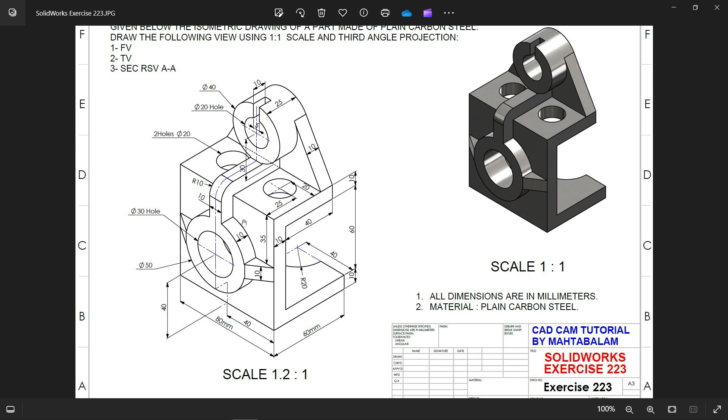We will start with this C frame. See the length 60, height you will observe 60, 10, 10, 80 millimeter, and this upper width 10, 40, 50 millimeter, and all thickness 10 millimeter, and the width of this 80 millimeter.

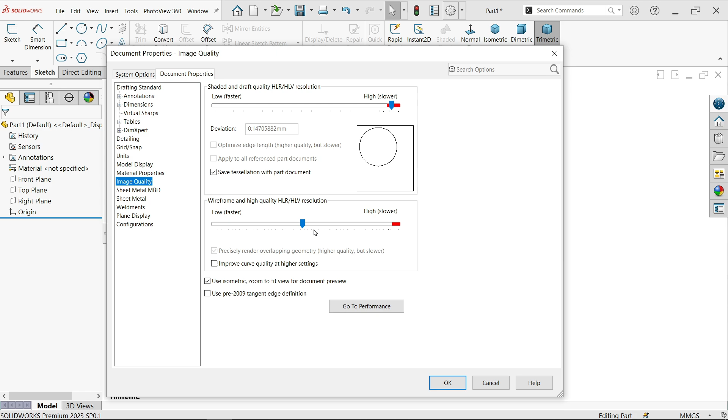So we have to first choose any plane. Let's go to option, properties. I am going to make image quality higher so that we will get a sharp edge. Unit also you can change it from here, mmgs. Now I am going to select plane, right plane, sketch.

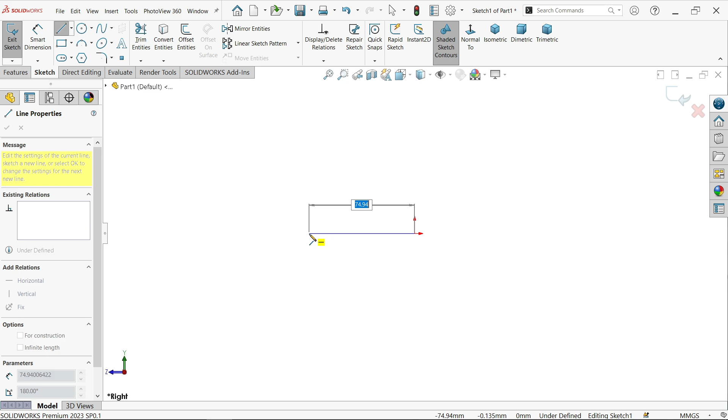Now activate line tool and start with origin. So click with left mouse and drag. Right click, choose select, and out of this line. Now activate smart dimension.

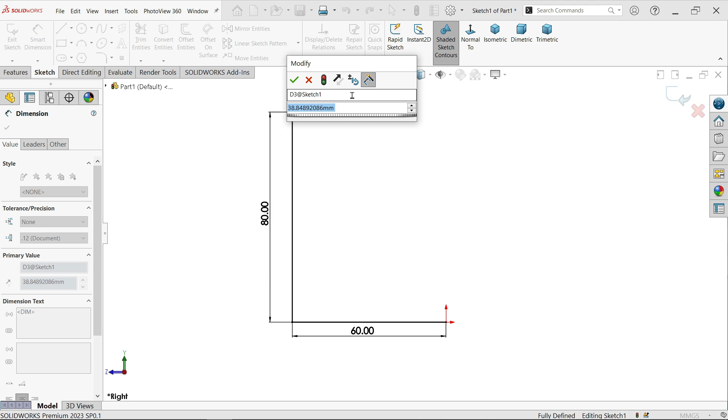Now this is going to be 60 millimeter. The height is going to be 60 plus 10 plus 10, it's 80 millimeter. And this one going to be 50 millimeter, 40 plus 10. Now simply activate extruded boss base feature.

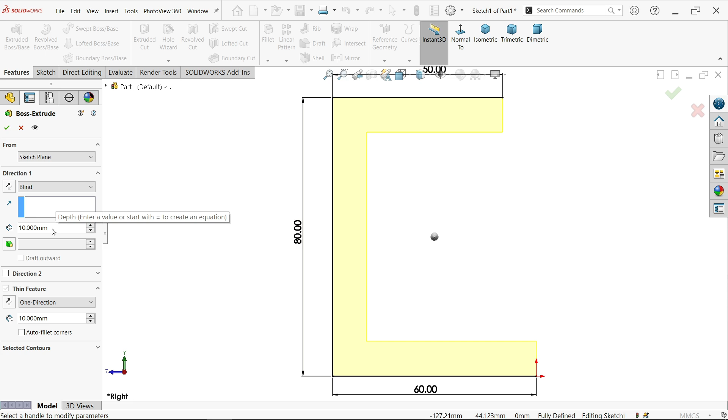Let's see normal view. Now first we have to apply direction. Start condition we will keep same, we are not going to move anywhere. In direction you have to apply the thickness or width. This is going to be 80 millimeter.

Let's see isometric view. See, but this is moving this direction. I want to move back side, so simply change direction. See, now comes down here. Thin feature activated because this is an open profile, or simply a line.

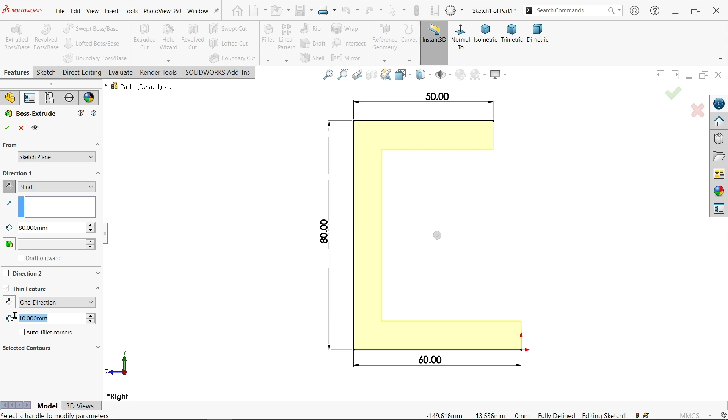Here you have to choose direction 1, direction 2, direction mid, direction 1. I want to add thickness inside, and how much? 10 millimeter. Say OK. And here look, if I select this edge, you will see at bottom right 10 millimeter length. That's it.

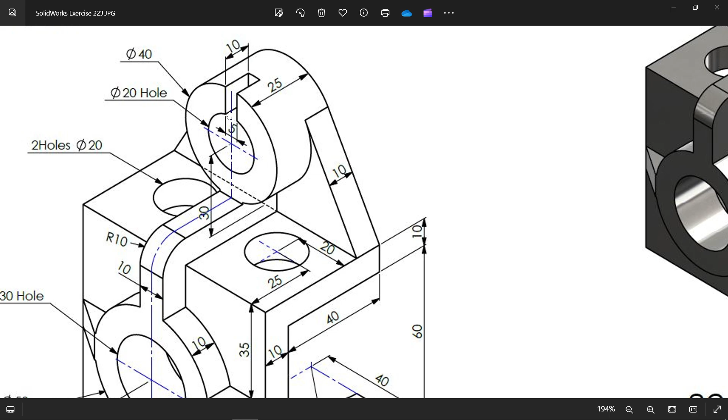Now let's add this feature. On top you will see 10 millimeter thickness, and from this line to this center 30 millimeter is the height. Now there is a circular body, this diameter 40, there is a hole 20 diameter, then there is one cutout, 10 millimeter and 5 millimeter is the width, and this width 25. So let's do this.

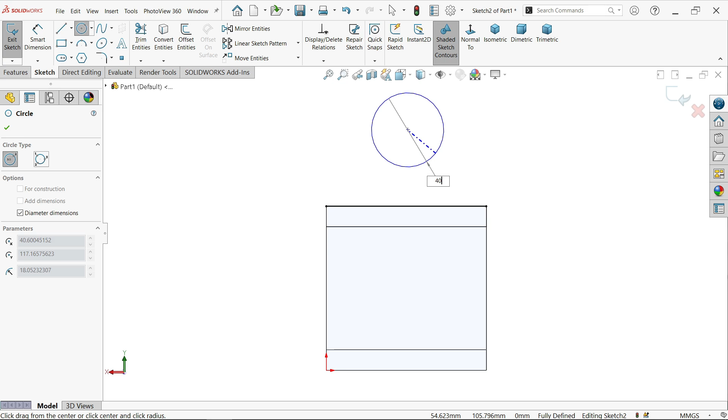I am going to select this back face, sketch. Now I am going to select this edge, convert entity. Select this edge. OK. Activate line tool. Draw somewhere 40, enter. Press escape key to exit. Now activate line tool.

Now move cursor over and you will see a tangent symbol. Look, yellow color tangent, click. Exit. Again activate line. Again I am going to activate tangent.

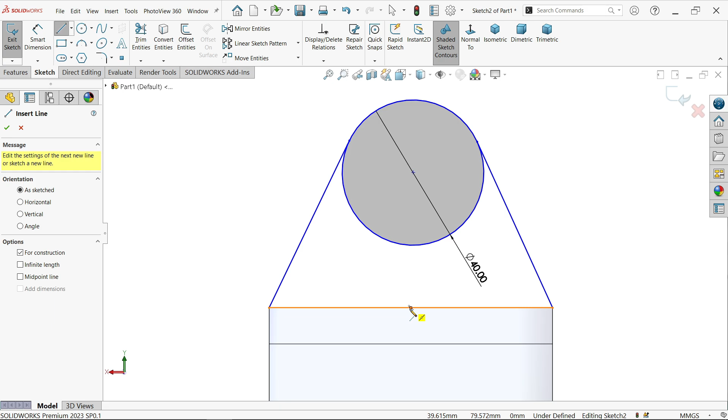Okay, let me fix this. So how you will fix? That's easy. Select this center line. Vertical. Now this is in perfect position. See, smart dimension. Now center to bottom distance 30. Look, this is fully defined sketch.

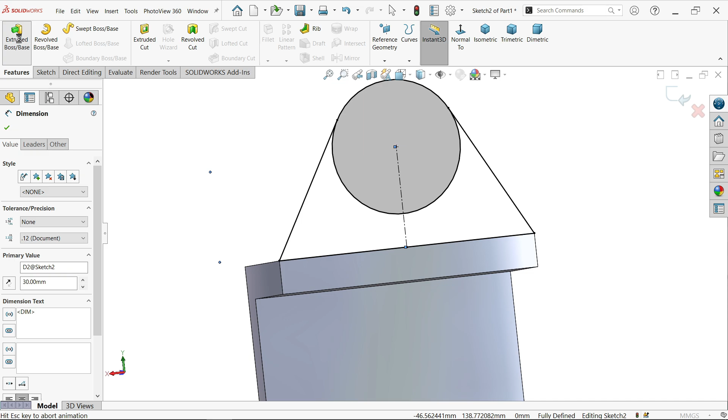Activate extruded boss base feature. And here I am going to select these two faces. Now see, in selected contour these two regions going to create, because here we have more than one closed profile. Direction blind 10 millimeter, but it moves wrong direction, so change direction, make inside, make sure it's merge.

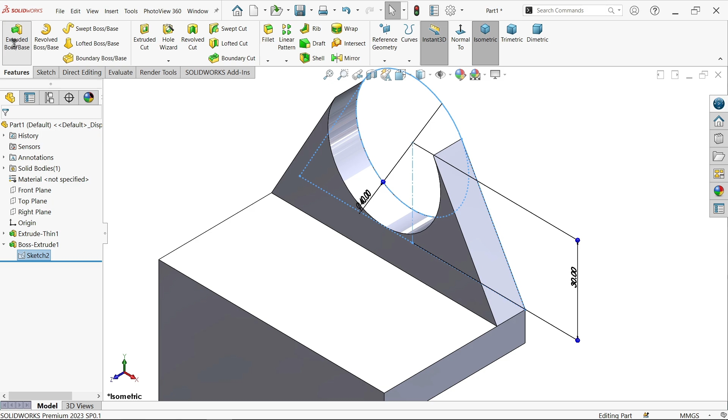Okay, look, again we have to select extruded boss base. Again in selected contour I am going to choose this one. How much? 25, but it is moving wrong side, so click this reverse.

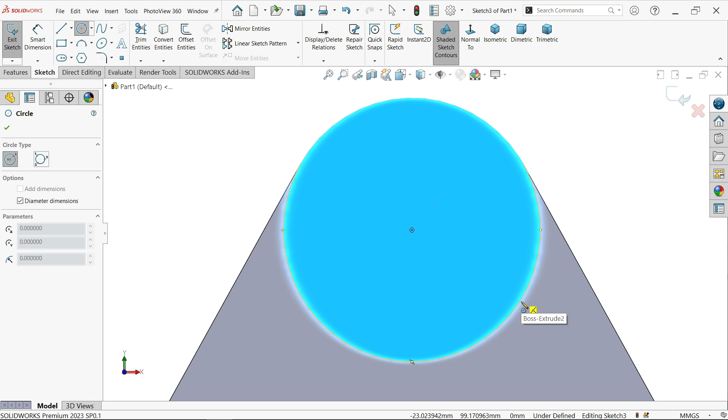Okay, look, sketch. Now here I want to create. Keep cursor and you will see center point. Now this is going to be 20. Press escape key to exit.

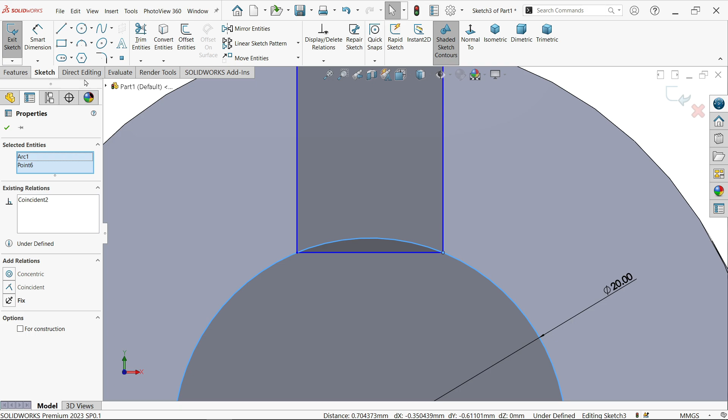Now I am going to choose here corner rectangle. Let me select this point and this one, coincide. Smart dimension, this one make 5 millimeter. Now select this one and this one, make tangent. Look, our drawing seems fully defined.

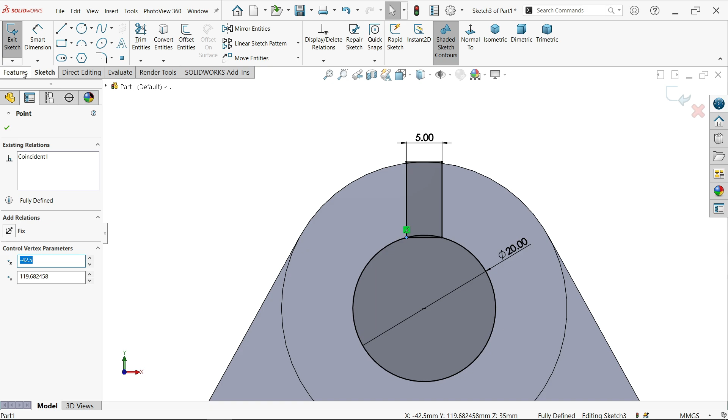This is not going to move, this is exactly at center. Now activate extruded cut feature. First I am going to select this line. If I select the line, this is going to cut a hole, and here keep end condition through all. You will see this is going to cut throughout the body.

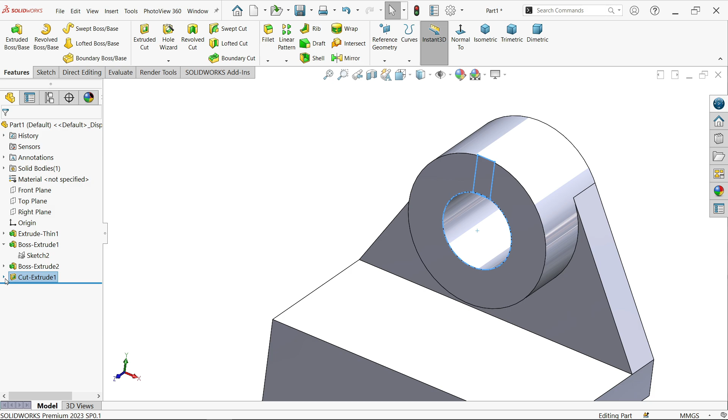Again, let's select the same sketch, extruded cut. This time I am going to select this rectangle. Look, the whole rectangle is selected, but here keep end condition blind and depth only 10 millimeter. You will see the preview here. Oh, that's it.

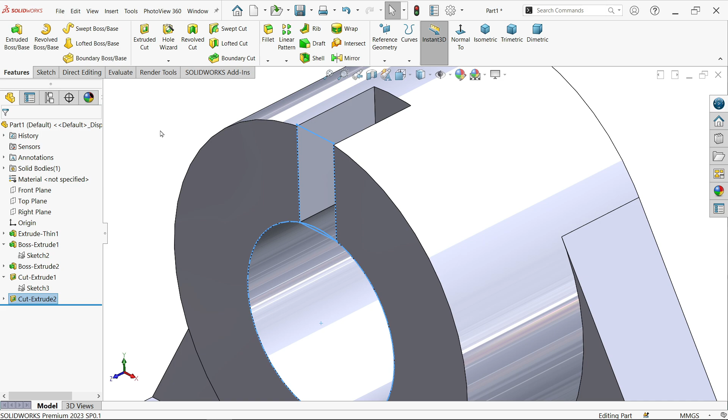Okay, now let's do one more thing. Now look at bottom back side, there is a hole cutout, R20, 40 millimeter. Then there is one circular body, you will see this one 10 millimeter depth, and this outer diameter you will see 50 millimeter, and distance 40 millimeter from this corner center distance, and distance from bottom edge 40 millimeter.

So I'm going to use hole wizard. Now here one, see legacy hole, simple hole. I'm going to choose diameter 40, radius shows 20, depth I'm not going to change here, simply choose up to next. Up to next means, okay, I'll tell you what exactly.

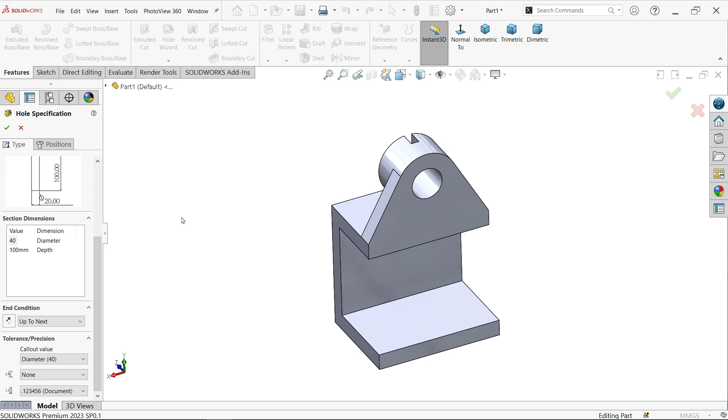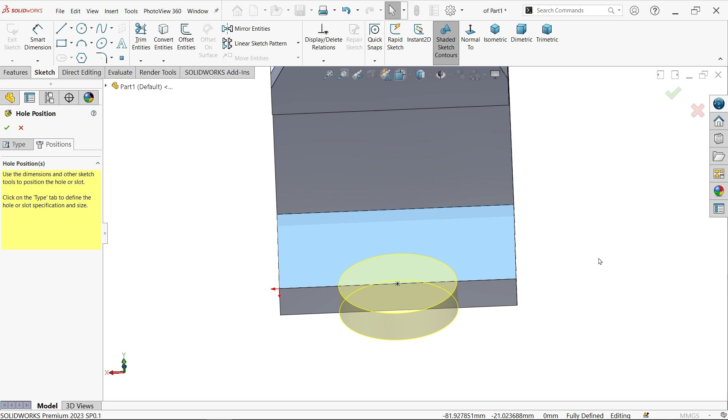Go to position, we have to select any face, so I'm going to select this face. Now look, this is activated. Now I have to place it, so I'm going to place at this center point. You will see this yellow center point is the center point of this line. So just simply press right, select. Now we selected up to next. Up to next means this is the starting face and this is the next face, so the hole is going to cut up to next face. Here we go.

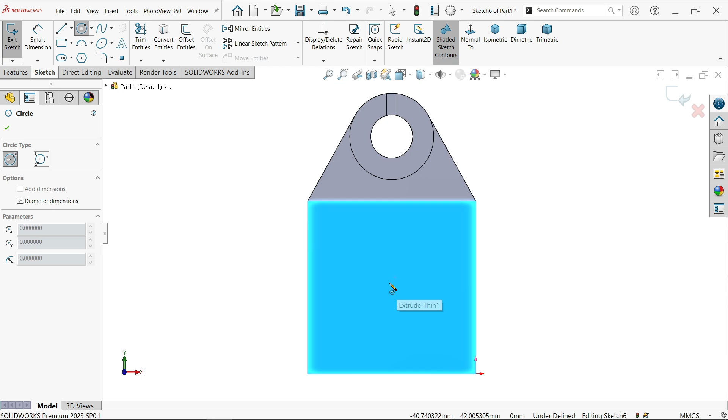Now select this face, sketch, activate circle, and here I am going to draw one circle with diameter 50, enter. Right click, select and exit.

Okay, simply extruded boss base and make depth only 10 millimeter, keep end condition blind, and direction also same.

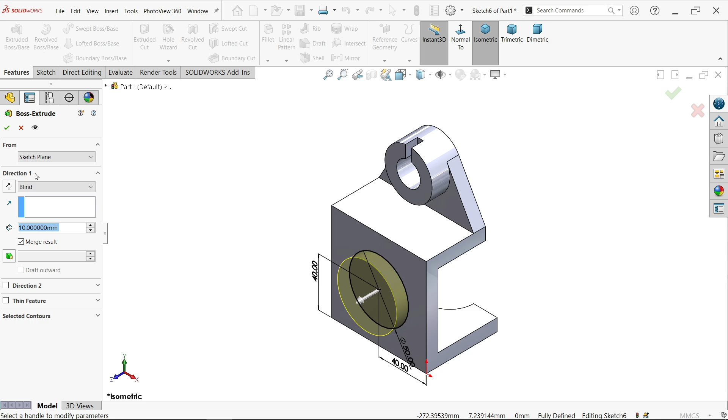Now here we have rib, see 10 millimeter, this side also same, and here also one rib, you will see clearly 10 millimeter corner radius, 10 millimeter, and this is going to fix with this. Okay, then later there is a hole, 30 diameter.

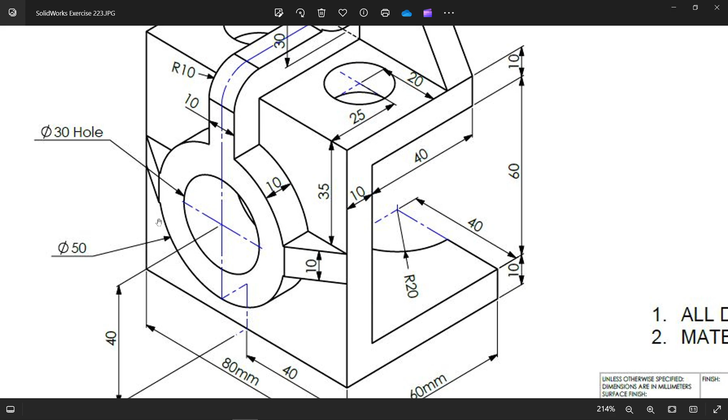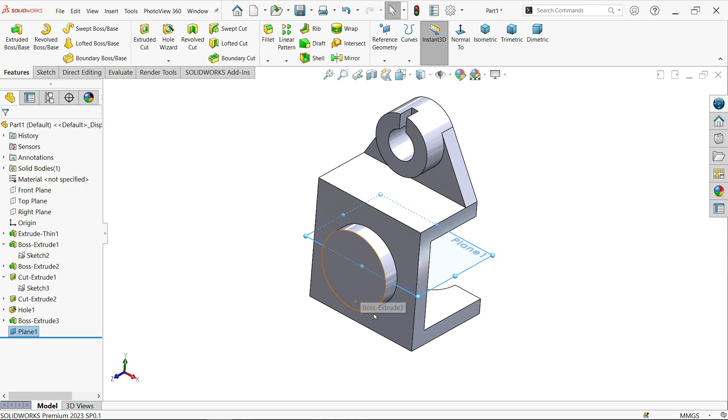So to create a rib here, we have to make one plane. First reference I am going to select this. Now here put dimension 40 millimeter, flip offset. Because this circle lies at just 40 millimeter above from those surface. So select the plane, sketch.

Okay, now I am going to start from here. Now let's say select here to this point. Now look, it seems black, meaning this is fully defined, but we have to extend a little inside because there is some problem in SolidWorks.

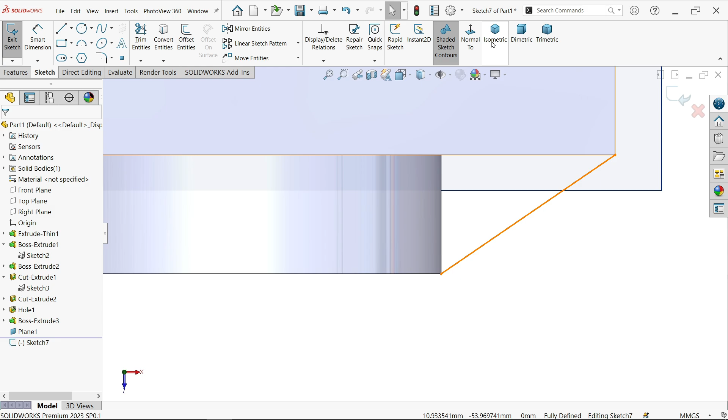Let's see how. Activate rib. Now thickness I am going to keep both side, so it moves equally both side, 10 millimeter. Now direction, flip material side. Look, see the arrow move towards inside. Say okay. Now it shows error. So what we will do,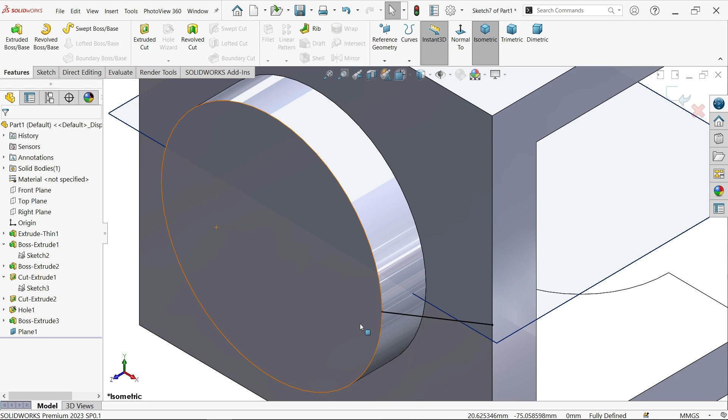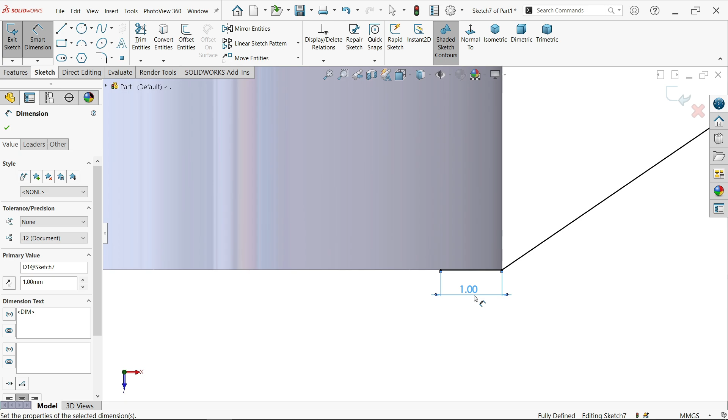again go to activate sketch and let's extend your line a little inside, and for dimension, just allow anything, let's say 1 millimeter. Okay, I hope it's enough.

Rib. Now see, again arrow is opposite direction, so simply choose flip material side. Say okay. Here look, let me hide this plane. See, due to this we have to extend our line up to inside.

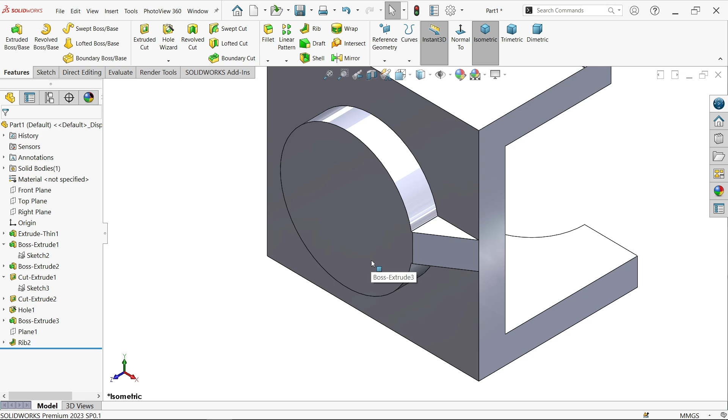Now let's choose mirror. For mirror also we need one center plane, so I am going to create one more plane. Plane, reference 1, reference second reference. Now if we choose two planes or two faces, it will show you one mid plane. So this is going to be our mid plane.

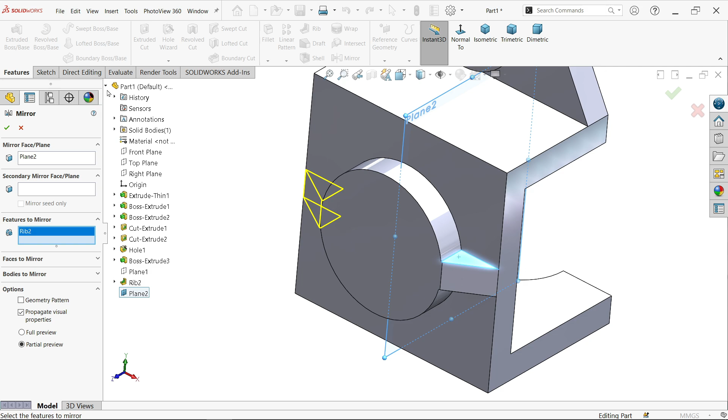Now let's mirror. Now see, the mid plane is selected. Now what do you want to mirror, feature to mirror. So directly I choose from here, or even though you can drop down and choose from here. Now rest you can keep as it is. Say okay. Look.

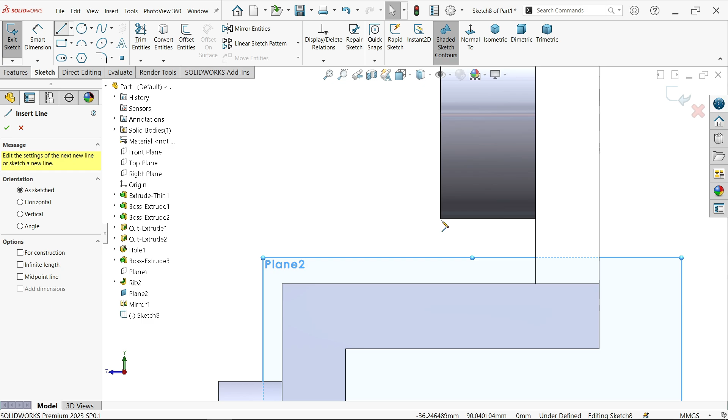Now select plane 2, sketch. Now here also we have to create one rib, but here also we have the same issue we faced with the first rib, so we have to increase a little. So I am going to start from here and connect to here, and let's increase, say 1 millimeter.

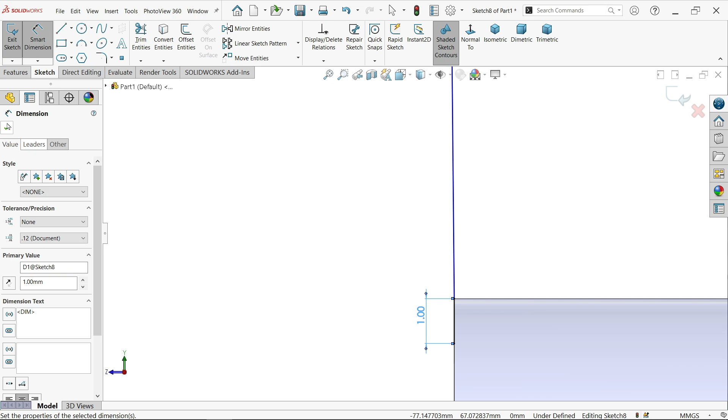Okay, let me select this line. This is not vertical, so click vertical. Similarly, okay, this is also vertical. Now here also I want to increase because of this circular edge, 1 millimeter, enter.

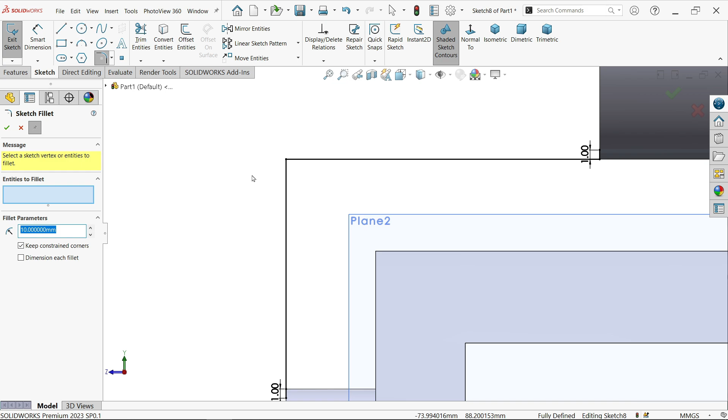Look, these drawings seem fully defined. Activate sketch fillet here, keep 10 millimeter radius and select this point. Say okay, cancel. Look, now let's see how it works.

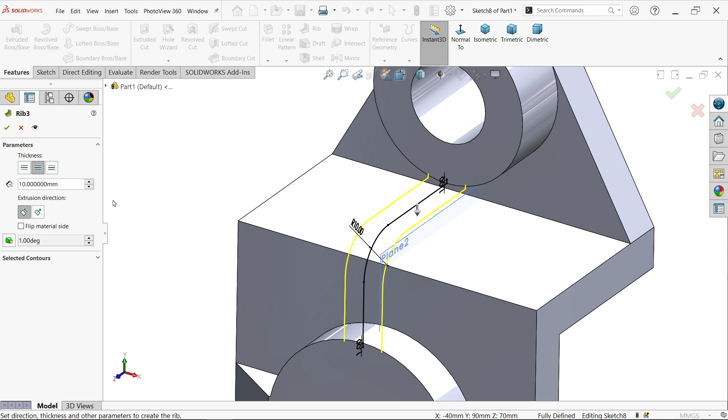Rib. Now you will see the arrow moving towards the body. Okay, keep thickness both side, 5 millimeter one, 5 millimeter other side. Material, no need tapered. Say okay, and here we go. See our rib.

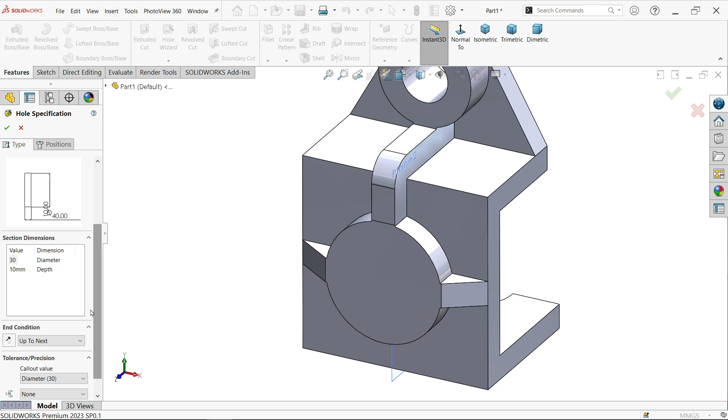Okay, let's make a hole here. Wizard, I am going to choose same, legacy hole. Here type simple hole. Now here I am going to choose 30 millimeter. Now depth, I am going to choose up to next because I want to make hole up to this face. Position, select this, just move cursor over and you will find a midpoint.

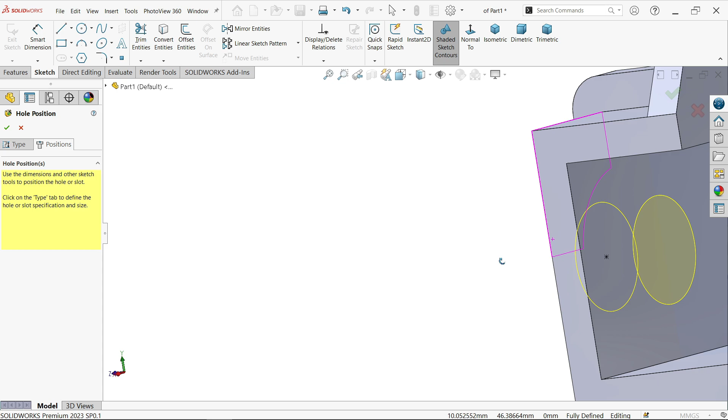If you don't find it, just keep cursor on the edge and you will see there is a midpoint. Now look, this seems a fully defined sketch. Here we go. Click and hide. Now look, there are 2 holes, 20 diameter, 20 millimeter from this edge, 25 millimeter from this edge. These 2 are the last holes.

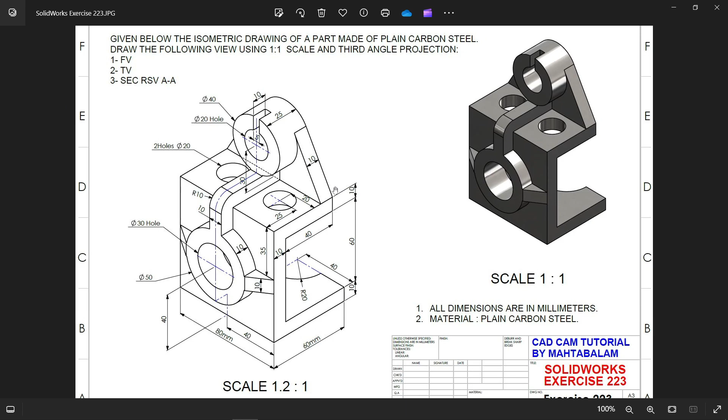Hole wizard, I am going to choose same legacy hole, simple type simple. Hole diameter I am going to choose 20. Now for depth, I am not going up to next, I am going with defined by end condition. Next, position I am going to select this

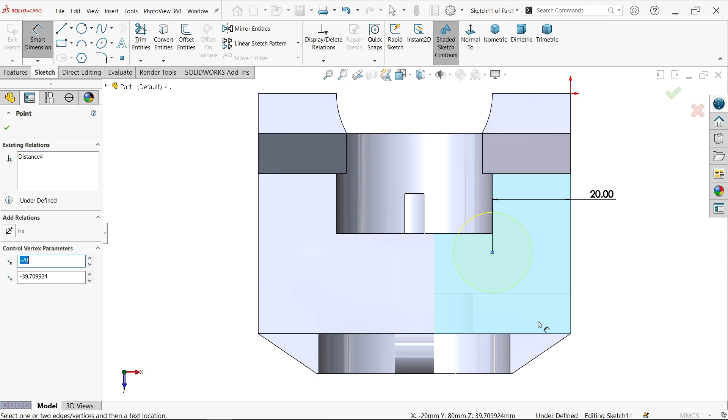and I am going to place somewhere here. Press escape key to get out and here choose smart dimension. Now from here to here it's 20. Similarly, again the smart dimension, 25. Just check isometric view. Okay, say okay. Look.

Now let's mirror this, so we will use plane 2 because plane 2 is the mid plane. Now select plane 2, activate mirror. Here mirror face or plane is already selected. Feature, simply directly choose hole. You will see the preview, propagated visual, partial preview. If you choose full preview, it will show like this, but partial is enough because what I want is shown.

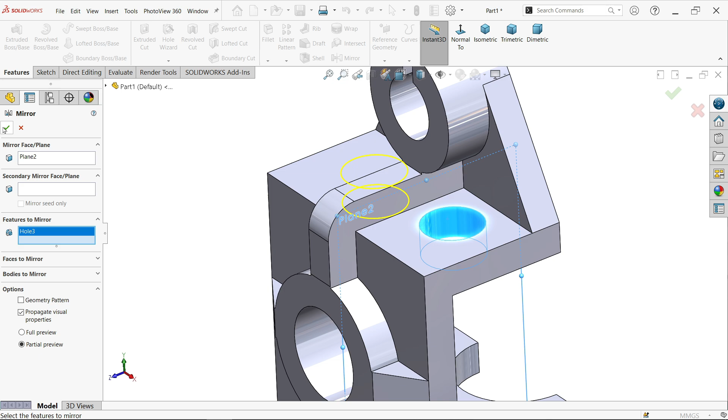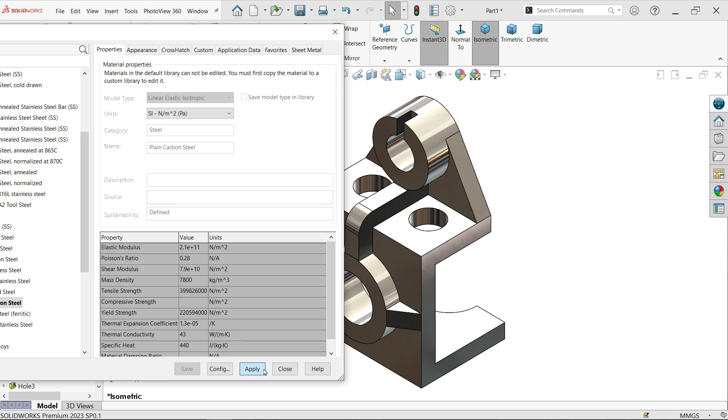Okay, now you will see here material not specified. Right click, edit material. Okay, plain carbon steel, plain carbon steel. You will see all the characteristics of material. Apply. Now you'll see the color change. Okay, look.